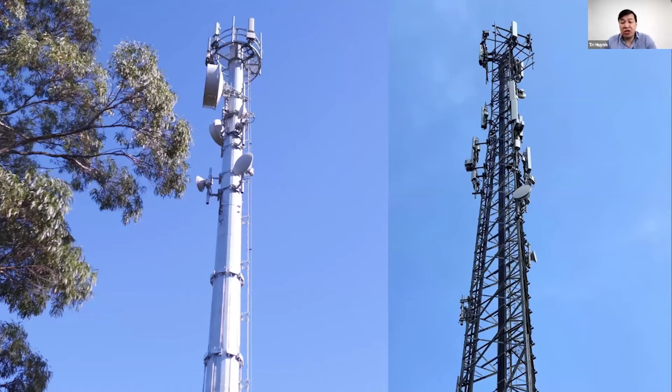LeBLANC's been around internationally for almost 60 years, designing and manufacturing towers. We've manufactured guyed masts, monopoles, and all types of freestanding towers, ranging from shelterized to rapid deployment solutions across the globe. So we embarked on Project DOCEO, site survey and engineering services on telco structures. Let's quickly go and understand, firstly, the why. So you can see here, we've got some photos of a tower where the rust has actually delaminated the steel, turning it into essentially waffle paper.

We had customers replacing their structures before their end of life. Build costs are continually rising, and it's an expensive process. Up until now, inspection relies on tower workers firstly climbing these structures. We have safety issues. We have some sites requiring the services to be turned off. And then you've got the issue of thousands and thousands of bolts to actually review. To solve this problem, we embarked on Project DOCEO.

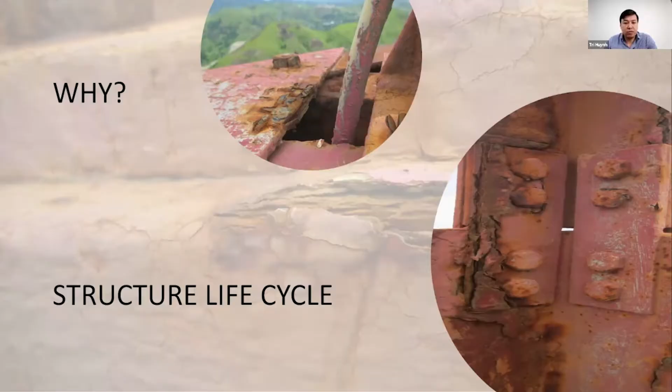So we delivered, through AI digital twins, a platform for asset owners and MNOs to actually go through their process of being able to analyze data. We have already implemented this with 2 major infrastructure owners in Australia. And let's go through the process to understand what this project is. So phase 1 is the capture process. We use UAVs to capture the structure itself. We have ground control points for referencing to get the accuracy we need. We then turn this into a digital twin. At this point in time, it's just a viewer: 3D viewer, photos, measuring tool.

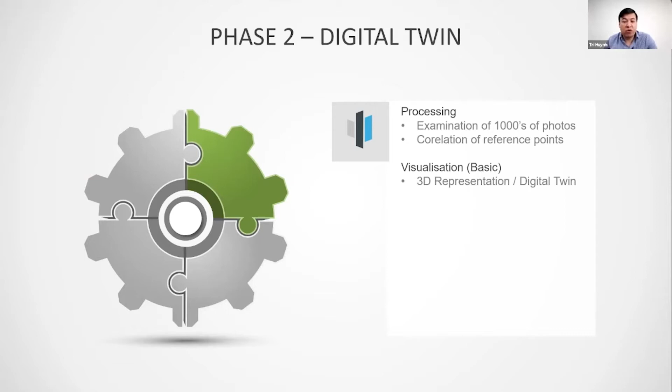And this is where it gets really exciting. Through machine learning and automation, we then create an AI digital twin where we can now identify equipment. We can do as-built, as-survey data, comparison reports of what we believe was there versus what is actually there, rust detection, bolt anomaly, EME, and AI boost. Once we have all that data, we can now use as-survey data to do engineering based on real data sets. We can do certified EME reports in a 3D model. And in fact, we did the world's first certified 3D EME live model.

Importantly, structural integrity review. We can actually analyze the structure. We can review equipment, mount installations. We can assess the bolt holes and the rust. We can review foundations and also do safety hazards and risks on the site itself. So what does that give us?

It allows us to do asset auditing, risk management, smart maintenance programs, meeting compliance and obligations, and change detection, which ultimately leads to asset life extension, importantly. Let's go back to see how this was made possible. So through as-builts, we can view the actual details of the structure itself.

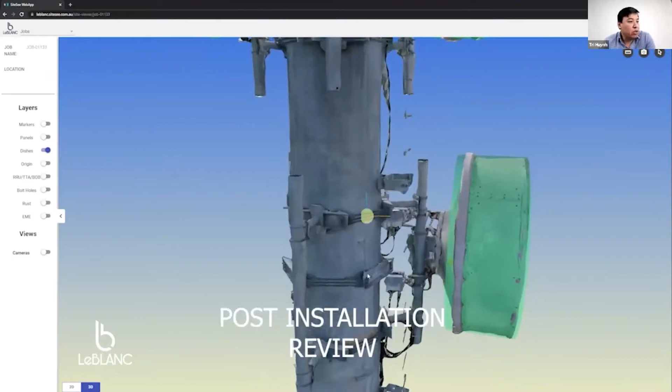Here we've got a monopole. Here we're inspecting a post-installation review and seeing the microwave impact on the ladder. As you can see here, the ladder and the microwave dish is quite close. Let's go through and review the process. So in design stage, yep, dish F there. There's a clear access space for the ladder. Okay, that's a bit odd.

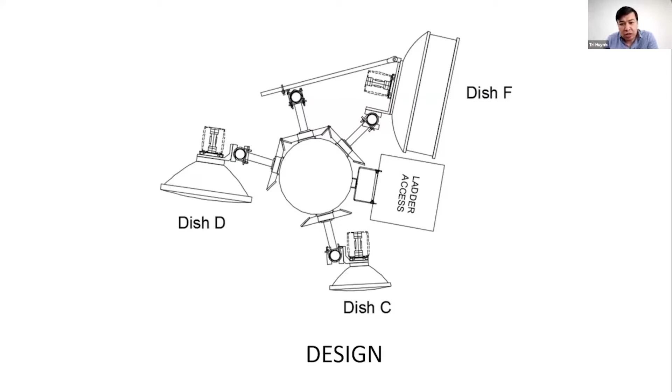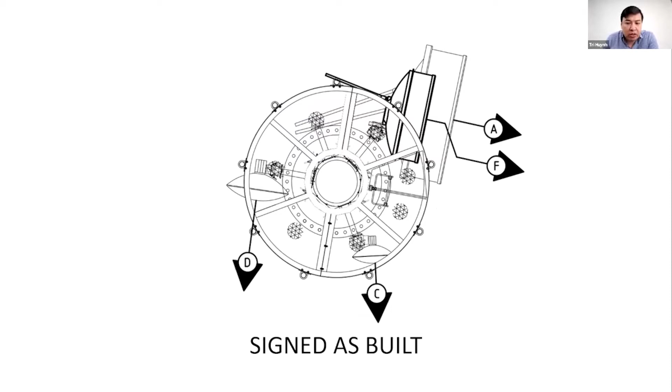Let's go through the signed as-built drawings. So there again, we can see the dish. It still has a bit of room in front of the ladder. And let's go drill through the as-surveyed data. So as you can see here, the dish is definitely in front of the ladder. And you can see also through our measuring tools that the space between the ladder and the microwave dish itself is 0.49 meters.

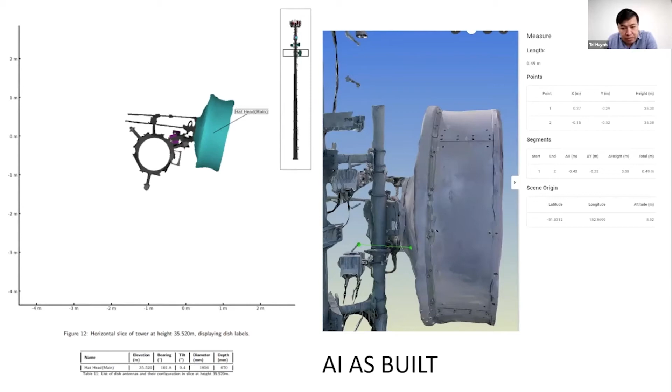So that's what DOCEO is. It's all those elements to create a core which is empowered by AI, and it wouldn't be possible without AI in this process. Thanks, Lucio.

Thank you, Tri. That DOCEO project is a real showcase for AI in the telco industry, and it seems to be delivering real value to both you and your customers. Well done. But for me, the standout was the way the AI detected the missing bolt. Now that just looks like a real case for AI. But before we get onto that, did you face any real challenges during the project? And if so, what were they like and how did you overcome them?

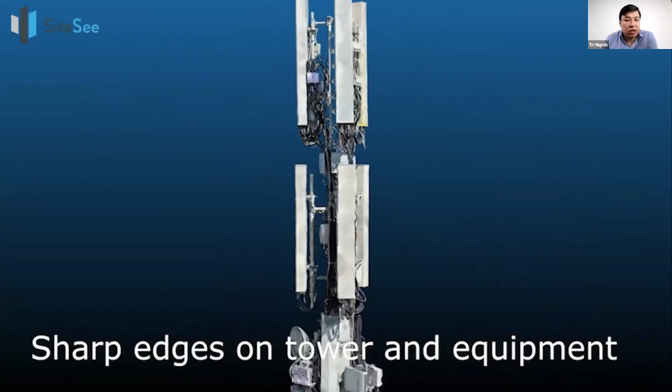Absolutely, and that is a really unexpected benefit of AI. Sometimes it just helps humans become better at what they do. As I mentioned, I really was impressed with that bolt hole detector and the missing bolt. That was a standout for me. But what was the standout success of the TowerCo program for you? And just sort of talk around that.

Yeah, I think the success for us was being able to get and demonstrate what as-surveyed data was. To date, we've got the terminology of as-built, and we've challenged that word. With Project DOCEO, we demonstrated to the client what was actually on site, what equipment was installed, at what height, what bearing, and with extreme accuracy. Data sets that were never ever available before.

You go back to as-built where, early in the days, people would use tape measures. We've got laser tapes, but how do you record that data set? Here, we've actually managed to give our clients a point of truth. There's no relying on a person taking a photo. It relies on the actual AI platform to deliver the point of truth.

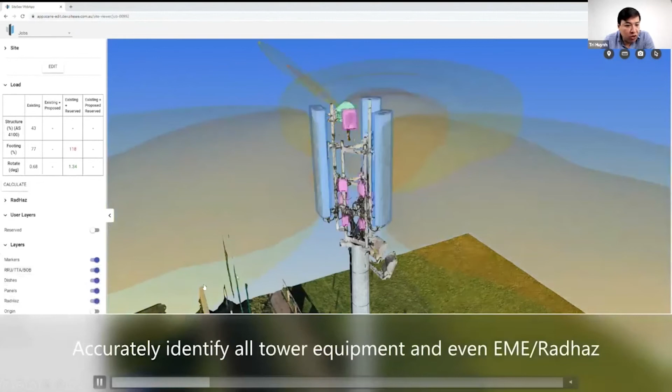So maybe you can talk through, Tri, what we're looking at here from your perspective. Sure. So this is our platform as you look at it now. We've got our AI digital twin. You can see the standard definitions here. You've got a load table, which indicates the existing structure properties of the structure and foundation and rotation. We've got our EME there, and we've got our selection of equipment.

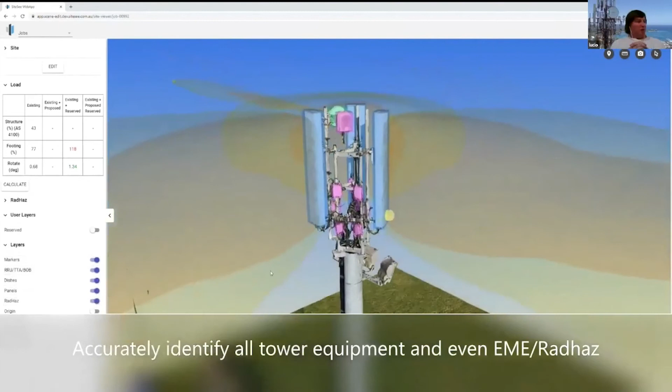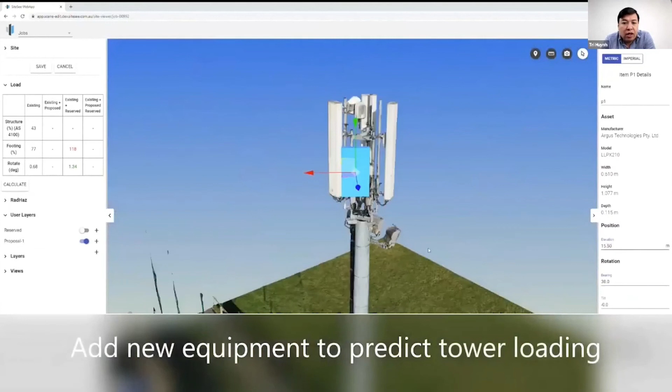Sorry, Tri. And that's the existing AI digital twin that you've been using for quite a while, right? Yep. So what else would you like to do now? As I said earlier, really being able to add new equipment in simulation so we can then actually design if the equipment can fit, if we can actually see if we get the separation requirements, line of sight, ensure that the mounting equipment can actually attach to the equipment itself, and then also making some decisions around, is the structure capable or not?

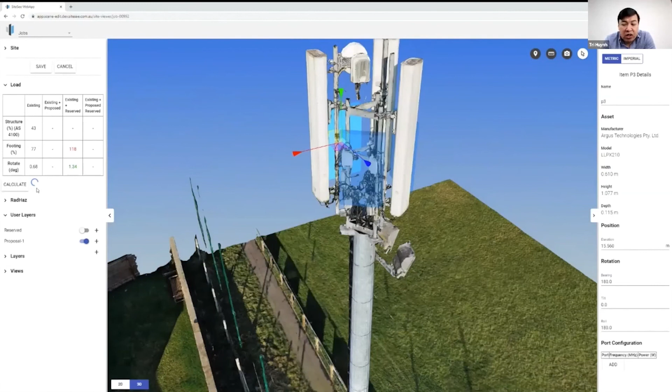A lot of the problems that clients face going on to a co-location or their own assets is the time it takes between doing a proposal and getting a design back, because the equipment itself and the structure are quite heavily loaded, and the 5G upgrade or any additional works may actually create overloading. And then you have simulations around at what heights or what equipment can I use to bring the loads down to avoid upgrades. This will allow us to actually make decisions at the right time rather than later on, which is going to have huge impacts in the speed of rolling 5G.

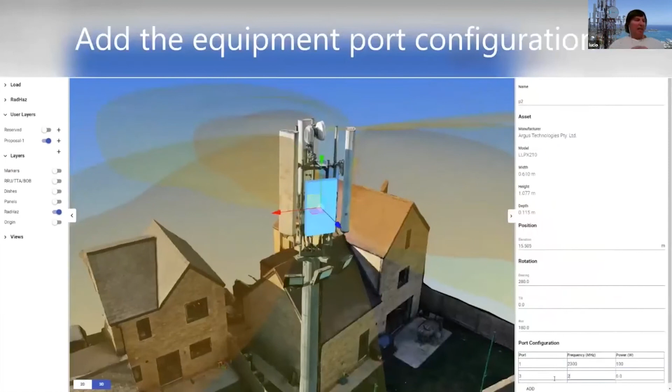I think you're right. I think this is where the real combination of AI and the digital twin really allows the human to do their job better, right? So AI is not at the moment going to redesign the entire tower, but it does do the heavy lift to allow the humans to do their job just that little bit better and a little bit faster. Is that a fair assessment? Yeah, I agree, Lucio.

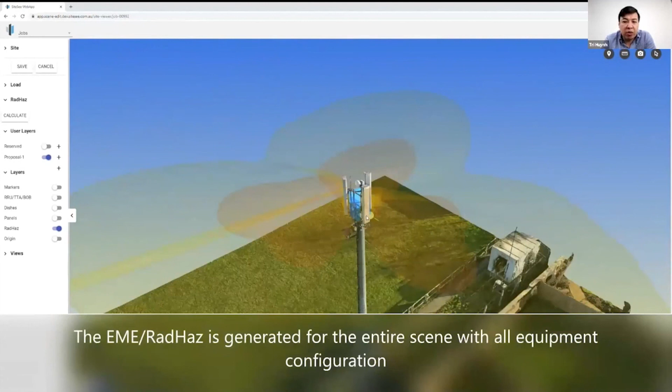We're not going to replace engineers. What this actually does is speed up the process of the engineering and the certification. It's getting rid of the back and forth, the loss of time that's required to do that. And it's then giving the data set required for our engineers or for any engineers to actually do what's important: actually designing, certifying, going through the finite details of the actual analysis rather than playing with RF designs. Let's let the RF engineers and the TX engineers do that design work and the grunt work up front.

Absolutely. Well, look, Tri, I think that we'll wrap it up here. I think this is a really good demonstration of how you and your company are delivering to the telco industry right now the benefits of AI. So congratulations and thank you. Thanks, Lucio. It was appreciated to be able to show that, and yeah, exciting times ahead.